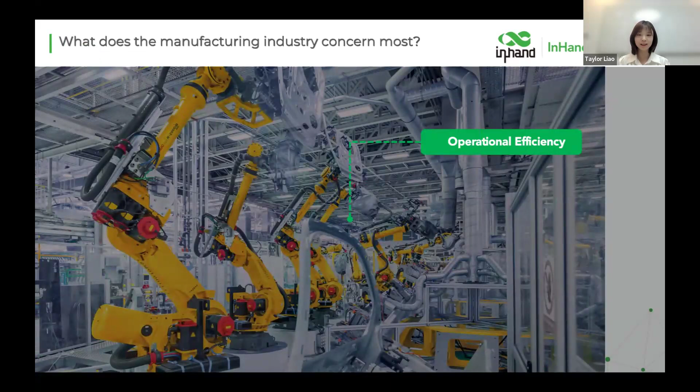Yes, and others, any thoughts? Also cost management, for example how to control the cost related to energy consumption, labor, materials, and daily maintenance. Yes, you are all right. Besides, they also need to consider quality assurance to provide high quality products, and safety to protect both workers and equipment, and many other factors.

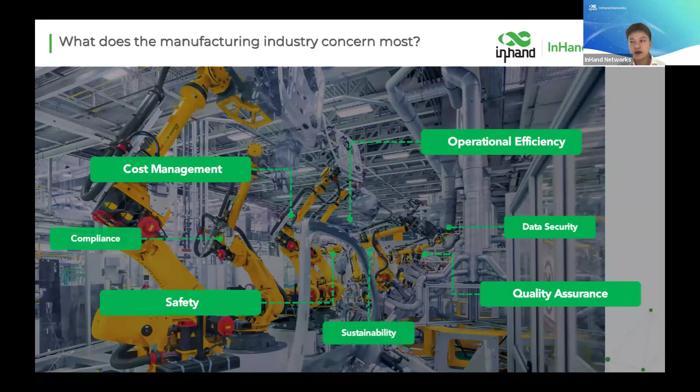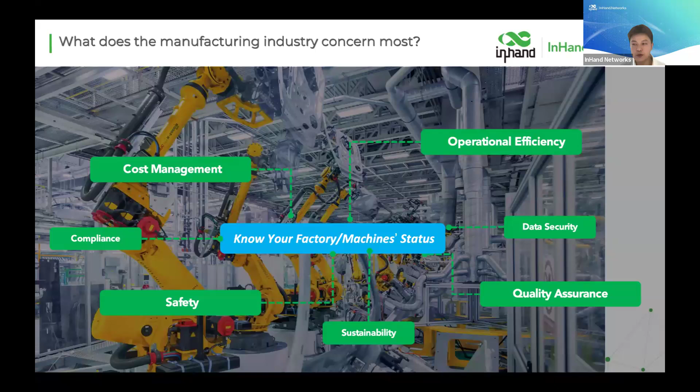In summary, you must know your factory and machine status. The more you know, the more competitive you will be in the market. So which technology can help you achieve all these benefits? I guess you already know the Internet of Things, IoT technologies. Generally speaking, IoT technologies help you collect your data in the factory, then transfer this data, analyze this data, and assist you to make the decision.

So it is a simple process from data collection to decision. It seems quite simple, but with this solution it can help achieve a lot of benefits like real-time monitoring, predictive maintenance, energy management, improved quality control, and enhanced safety. Sounds very attractive. Actually, IoT technology is not new, it has been applied worldwide for a long period. But do you know what are the latest trends?

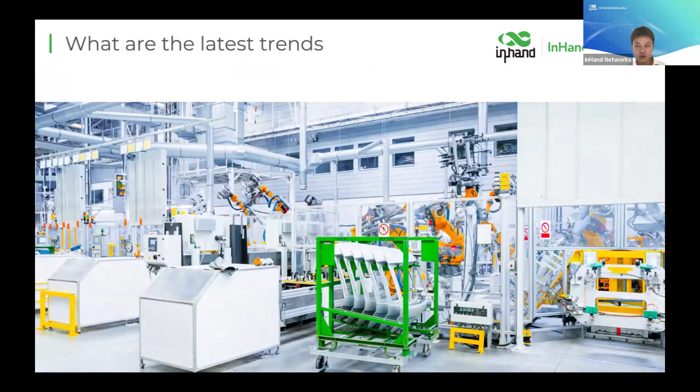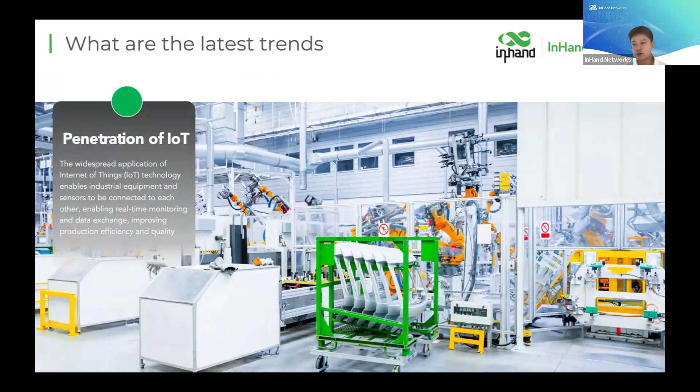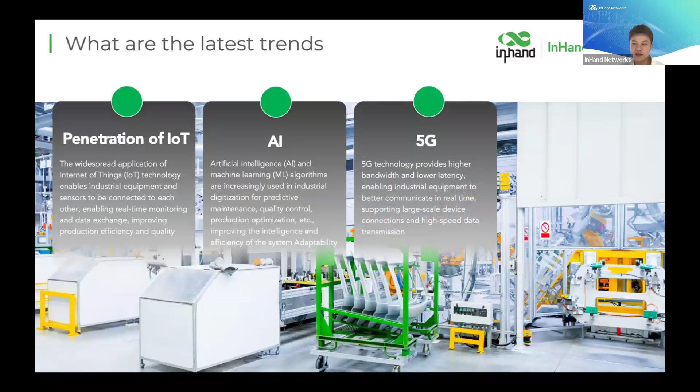I would say first the penetration of IoT technology from larger equipment to tiny sensors. Every electronic sensor in the factory can be connected to the internet to get as much information as possible. Second is AI, a very hot topic, which can be used in IoT as well to make smart decisions, for example in graphics or video handling scenarios. The third one is 5G, to provide faster speed and lower latency to enable equipment for better communication in real time.

And the last one is edge computing. It enables data to be processed closer to the data source, so it reduces latency and adapts to real-time requirements. In summary, three words: deeper, faster, and AI. As InHand Networks, we are following all these four trends, but today I want to focus more on the edge computing solution, which we have been studying for years.

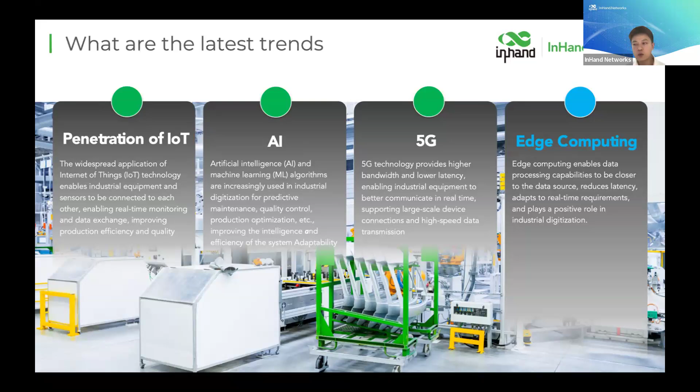So in this layer, we divide our solutions into four parts. The first one is for simple data pass-through, we would use our industry router. Then for protocol conversion scenarios, we recommend the edge gateway. And then we have standard edge computing solutions and also accelerated computing solutions. The data collected will be further transferred to the third layer, the platform layer, where the data can be further analyzed and help you make other decisions.

In this layer, we also provide our DeviceLive cloud platform for devices to remote manage their devices and to carry out unified monitoring and remote control of devices, as well as manage your edge computing applications.

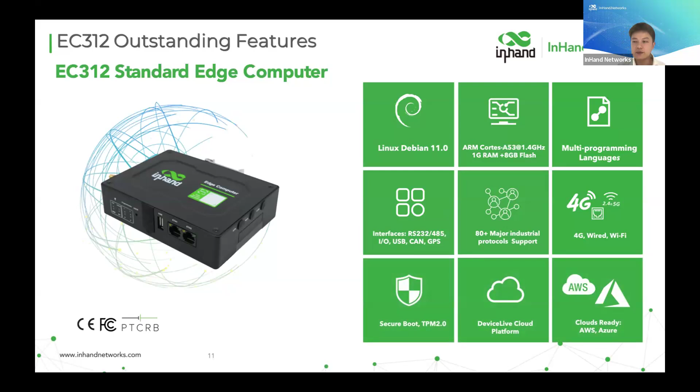It supports more than 80 major industry protocols in the market, and you can use either 4G, wired, or Wi-Fi connection. We also adopt a very high security strategy of TPM 2.0, and it supports different cloud platforms. Let's go deeper into the hardware and software features.

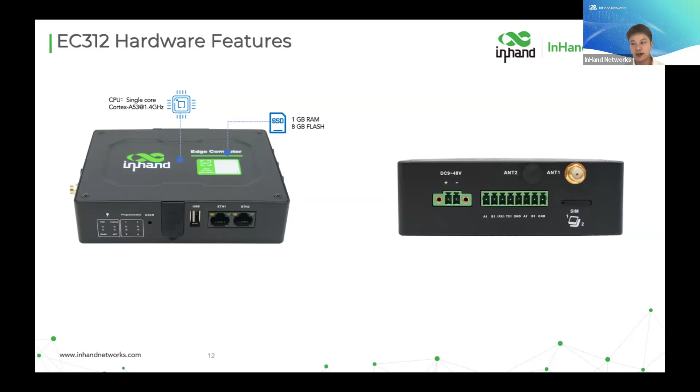First, for this EC312, we adopted the ARM single-core Cortex-A53 chip, which can offer sufficient performance for light to moderate computing tasks, with very good low power consumption, good thermal management, and of course a very good price. On the front side, you can see it supports 2 100-megabit Ethernet ports and 1 USB.

On the left side, there are different interfaces. Above is the 4G antenna, and below there are 2 serial ports. One can use either RS232 or RS485, and the other is fixed RS485. We also want to provide flexibility for the clients.

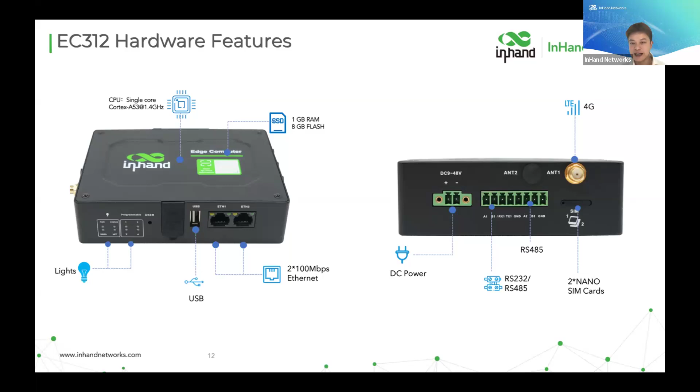It also has 2 nano SIM cards this time. On the right side, you can see it also has the GNSS and Wi-Fi antenna.

One interesting point for this device is that we add an extension module. The client can choose either 2 AI, or 4DI DO, or 2 CAN with 1 serial port, or even none. This provides even higher flexibility for your service. You can choose the most suitable one to save your cost.

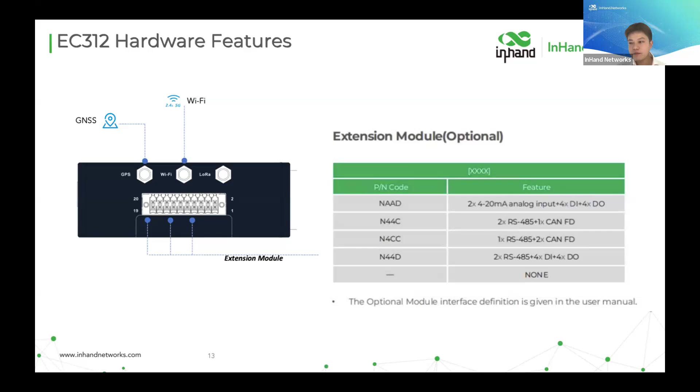Yeah, so that's the hardware side. Next, I will discuss the software features, which can be summarized into 4 points. First, we're an open platform, running the Open Linux Debian 11 system, and it also supports third-party applications like Node-RED and Azure IoT Edge.

Second is the DeviceSupervisor agent, which can help you easily collect and handle data. Third is the cloud platform that helps you remotely manage your devices.

Last is the stringent safety strategy. As we see in the industry market, data safety is considered by more and more manufacturers. So this time for our EC312, we added Linux system security patches and vulnerability remediation service, and we also adopted the Trusted Platform Module TPM 2.0, an enhanced hardware-based security feature.

So you may wonder what edge computing is. Taylor, do you have any idea what edge computing is? According to my understanding, edge computing is to bring computation and data storage closer to the location where it's needed, typically at the edge of the network, near the source of data.